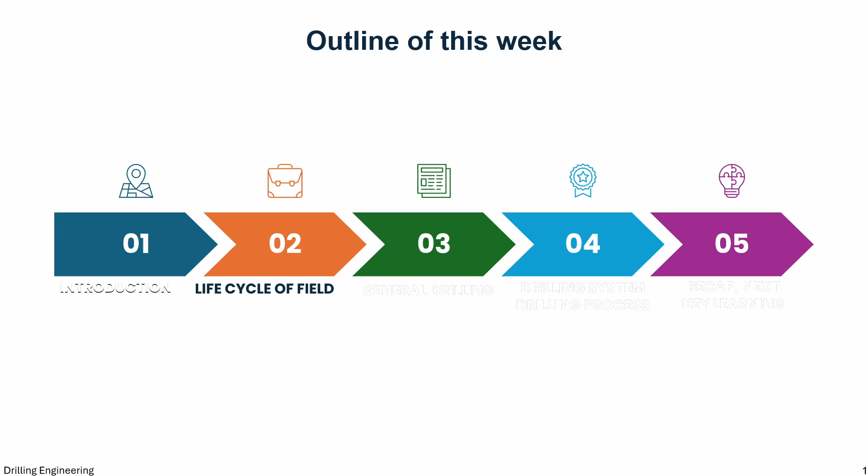We are now entering the first major section, the introduction and the link between drilling and the field life cycle. This section will help you understand why drilling engineers are involved far beyond simply operating a rig.

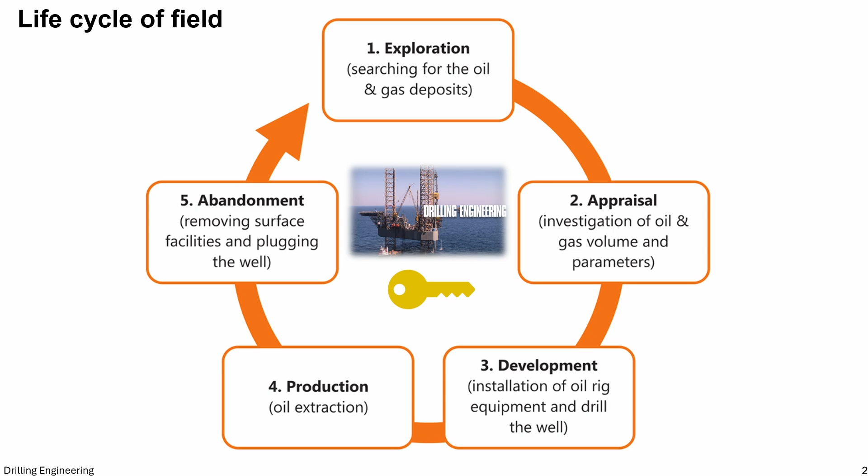Every oil or gas field passes through a life cycle. That life cycle typically includes exploration, appraisal, development, plateau production, decline, and abandonment. Drilling engineers contribute differently at each stage. Their responsibilities change depending on whether the well is for discovery, evaluation, production, intervention, or late field optimization.

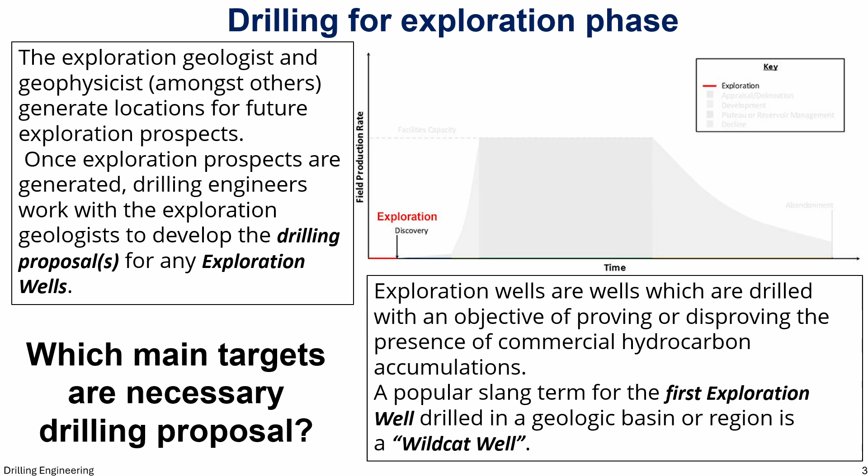Exploration drilling is high risk because there is still major uncertainty, but it is also very important because it determines whether a field can move forward. This slide gives a detailed look at what is needed in a well drilling proposal.

A drilling proposal usually includes the rig type, surface location, well target, depth, directional plan, wellbore diameter, bit specifications, geological cross-section, pore pressure profile, fracture pressure expectations, casing design, mud design, safety procedures, required data acquisition, drilling time estimate, and cost estimate. This shows that drilling engineering begins long before the bit touches the ground. Good drilling operations depend on strong planning and strong integration of geology, pressure prediction, mechanical design, and logistics.

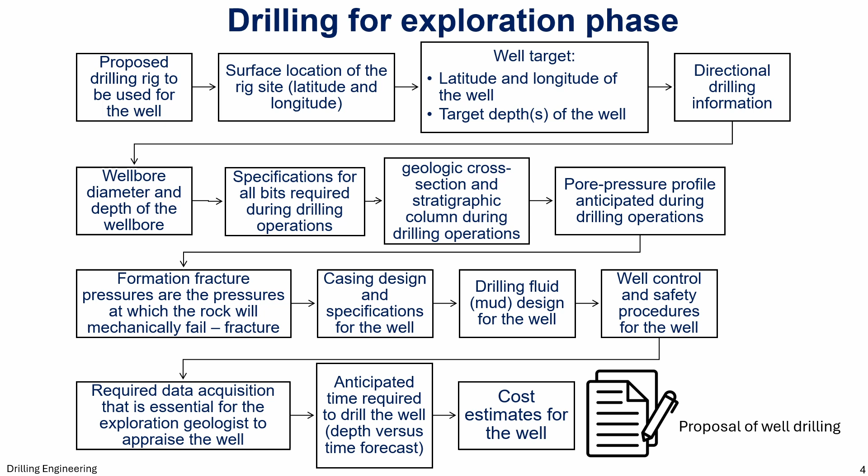After a discovery is made, the project enters the appraisal or delineation phase. At this stage, more wells are drilled to better understand the size, continuity, and performance of the reservoir. The rig schedule becomes very important, and drilling engineers work closely with development geologists and reservoir engineers. This phase often includes decisions about whether wells should be temporarily suspended for future use, or permanently plugged and abandoned if they are no longer needed.

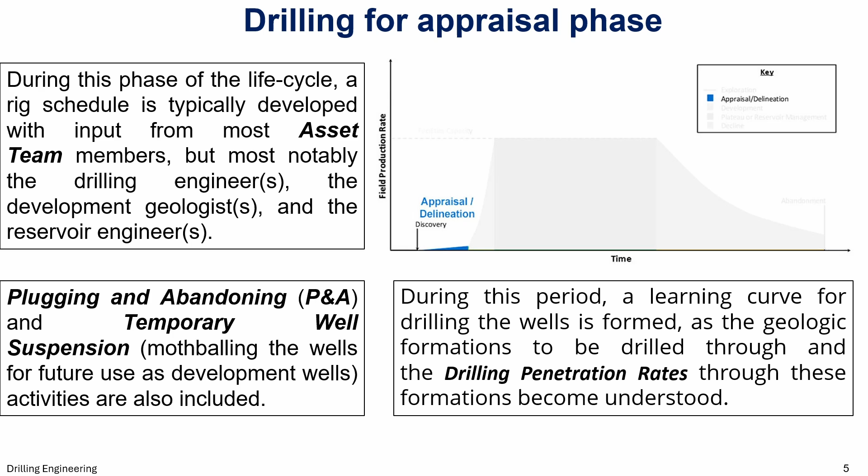Once the reservoir is considered commercially viable, the field enters the development phase. Here, wells are drilled primarily for production, and the development plan begins to be implemented at large scale. This phase is very important economically because it directly affects how fast the operator can generate revenue from the field. The slide also notes that as more wells are drilled, the learning curve improves, drilling times become shorter, and teams make better use of lessons learned from previous wells.

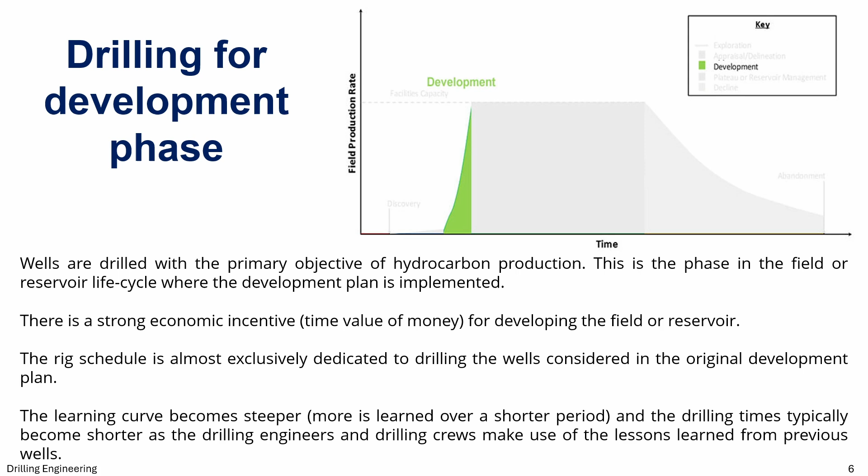Drilling is also important during the reservoir management phase. At this stage, wells may need interventions such as secondary cementing, tubing replacement, recompletion, well deepening, or milling operations. These activities are not necessarily about drilling entirely new wells, but they still require drilling-related engineering knowledge and operational control. This is a very important idea. Drilling engineering does not stop after the initial well is completed.

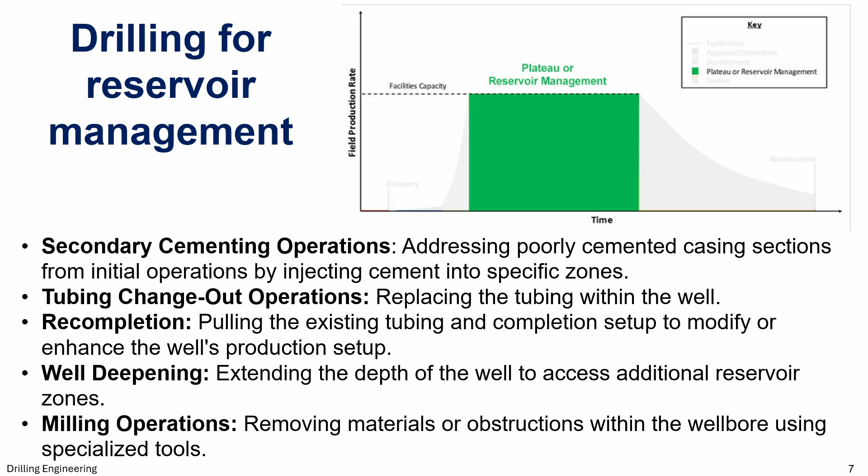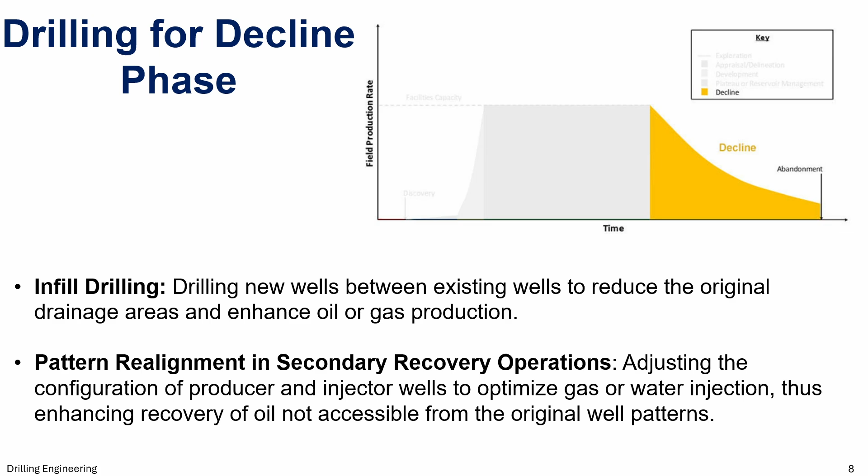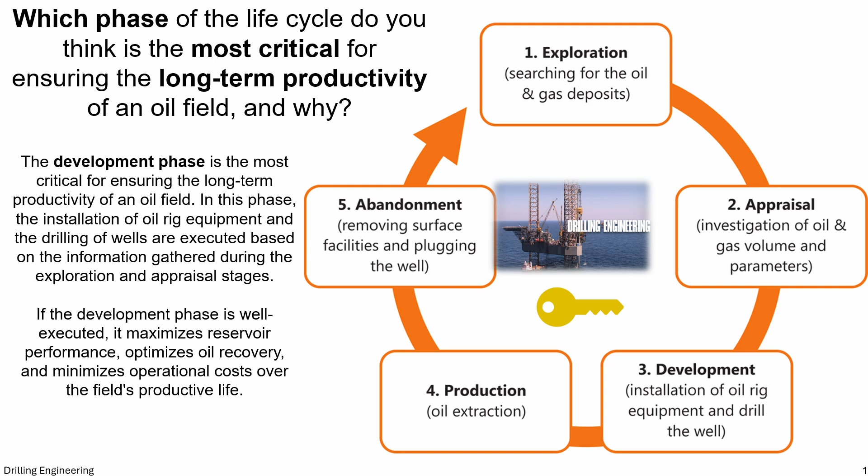The answer is the development phase, because this is when the production wells and infrastructure are actually implemented based on everything learned earlier. A well-executed development phase can maximize recovery, improve reservoir performance, and reduce operational cost over the life of the field. This is a very good teaching point because it shows that success depends not only on making a discovery, but on developing it correctly.